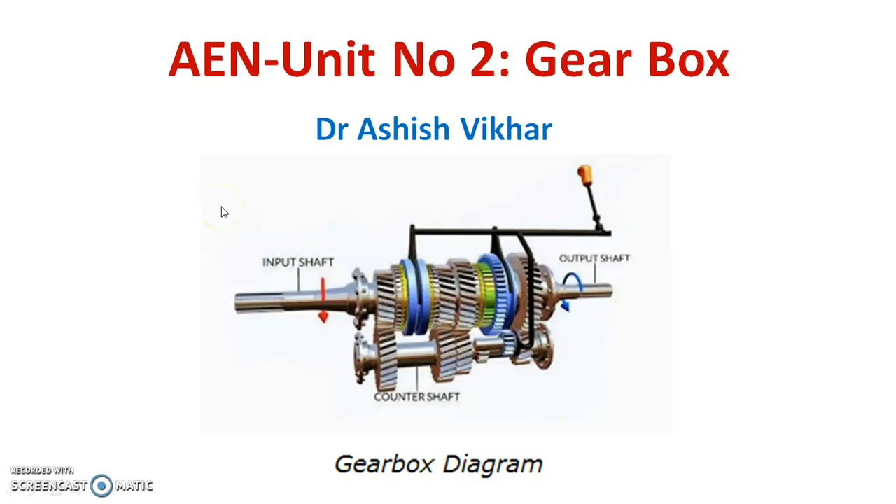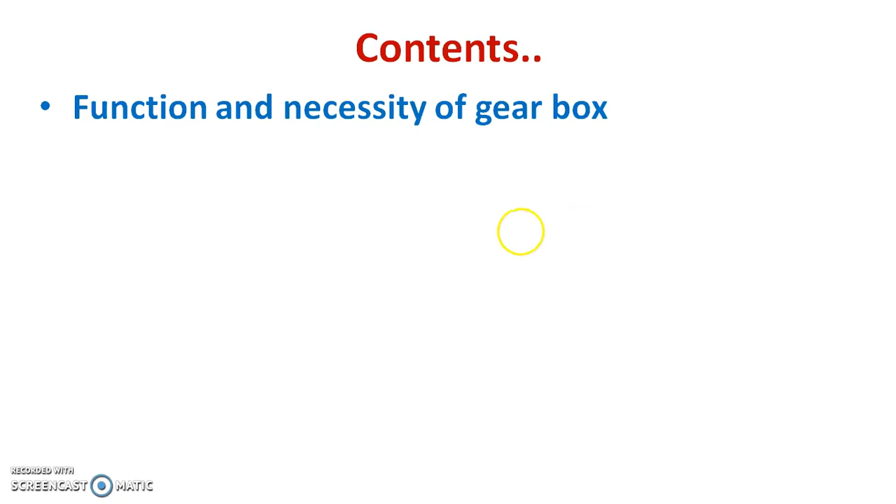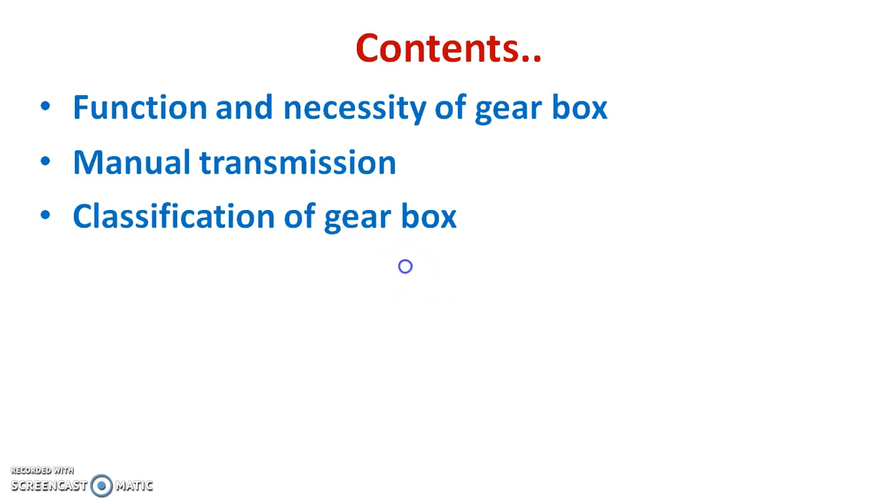In this, we will study basically the function and necessity of a gearbox, what is meant by manual transmission, how the gearbox is classified, and different gearboxes mentioned in the syllabus. One of these is called a constant mesh gearbox, so we'll study its construction and working with its power flow diagram. After that, the construction and working of a synchromesh gearbox with its power flow diagram. These are the two main important gearboxes we have to study.

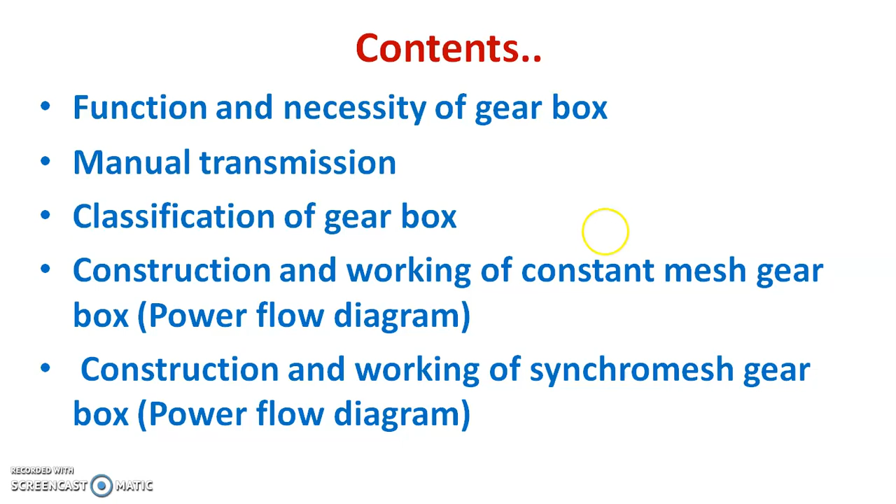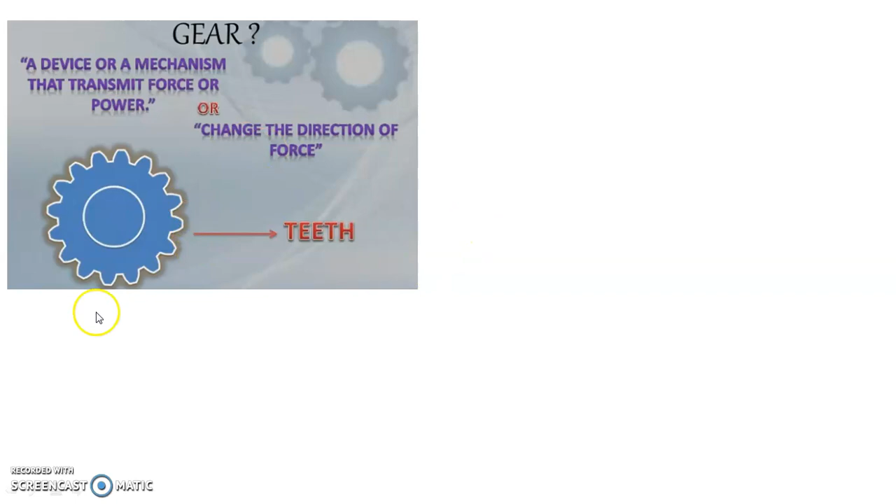Starting with what is meant by gear. We know very well what a gear is, which you have studied already in the second year. It is a device or mechanism that transmits force or power, or changes the direction of the force. This is a gear that you will see in this picture.

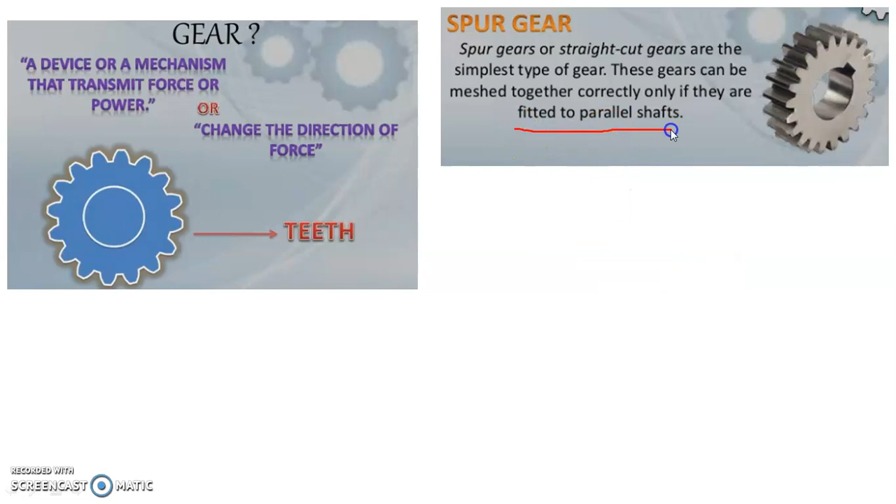After that, there are certain types of gear. The number one type is the simplest gear, called a spur gear. Spur gears or straight cut gears are the simplest type of gear. These gears can be meshed together correctly only if they are fitted to a parallel shaft, as shown here. This is a spur gear.

After that, next is the helical gear. Helical gears offer a refinement over spur gears. The leading edges of the teeth are not parallel to the axis of rotation, but are set at an angle. So here is the important point: the leading edges of the teeth are not parallel to the axis of rotation, but set at an angle. This is the second type, and you will see the picture of this helical gear.

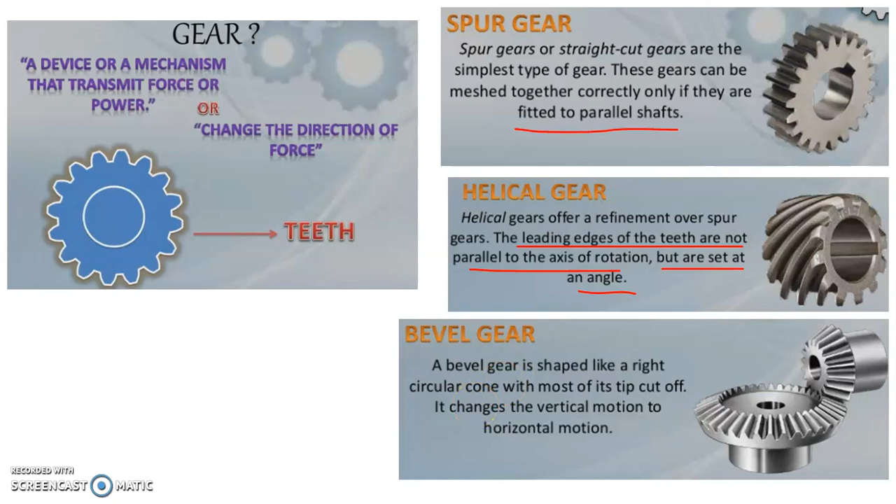The third gear is the bevel gear. A bevel gear is shaped like a right circular cone with most of its tip cut off. It changes vertical motion to horizontal motion.

Next is the double helical gear. Double helical gears are herringbone gears, so herringbone gear means double helical gear. You will see the picture of this in this slide, and it overcomes the problem of axial thrust.

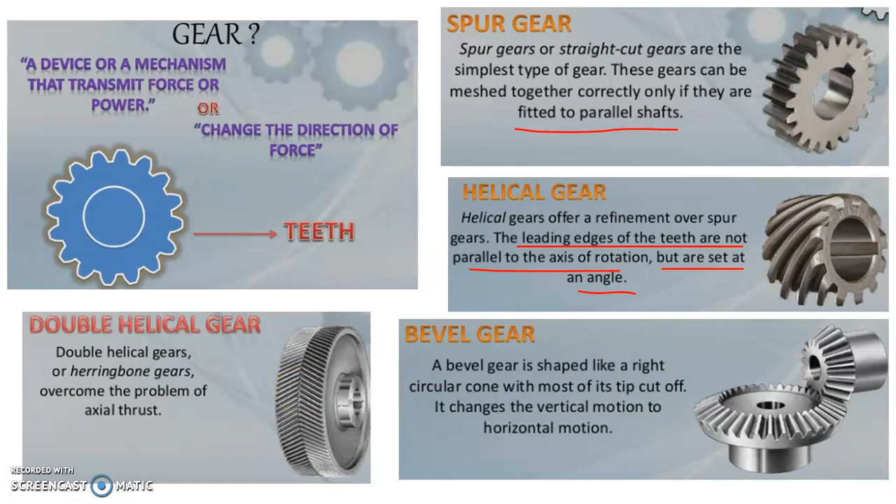After that, the gear wheel or worm wheel. Worm gears resemble screws. A worm gear is usually meshed with a spur gear or a helical gear, which is called the gear wheel or worm wheel.

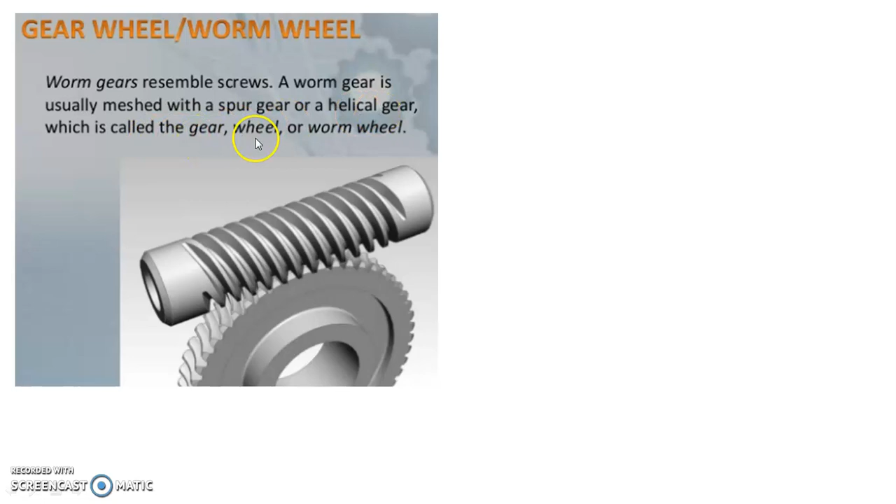Next is rack and pinion. A rack is a toothed bar or rod that can be thought of as a sector gear with an infinitely large radius. Torque can be converted to linear force by meshing a rack with a pinion. The pinion turns, and the rack moves in a straight line. So these are certain types of gears.

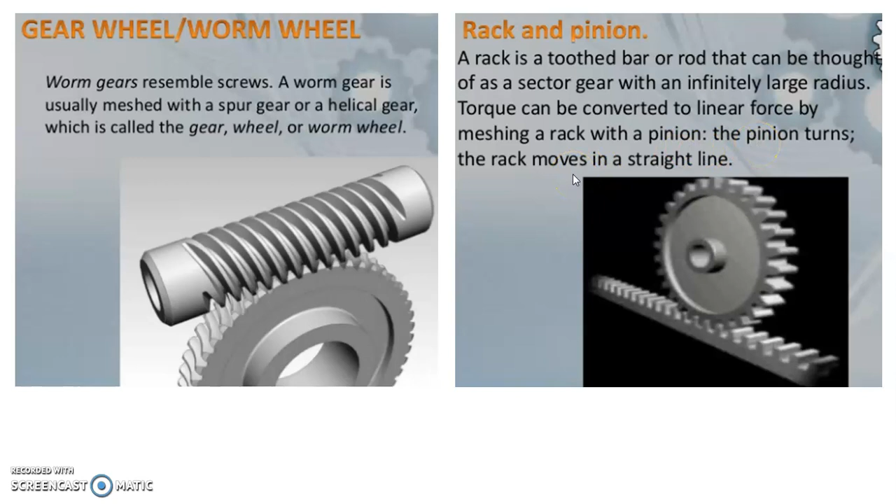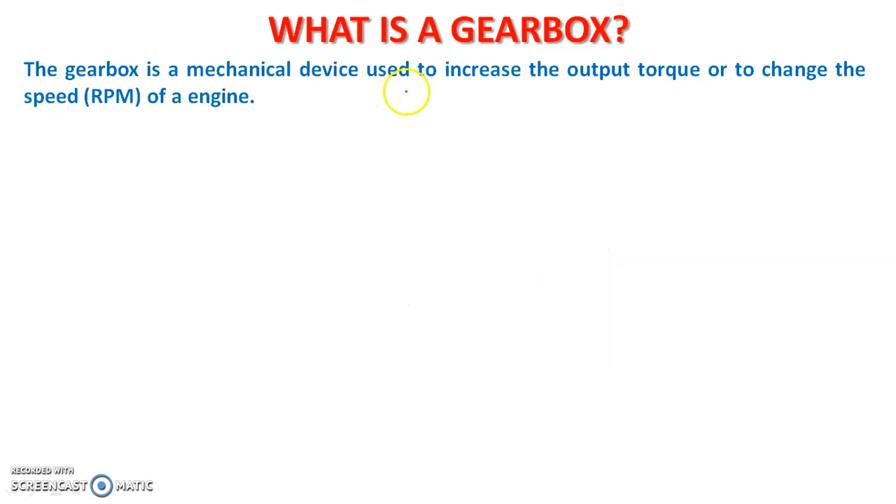So what is a gearbox then? The gearbox is a mechanical device used to increase the output torque or to change the speed of the engine. So what is the purpose? That is also given in this definition: it is used to increase the output torque or to change the speed of the engine.

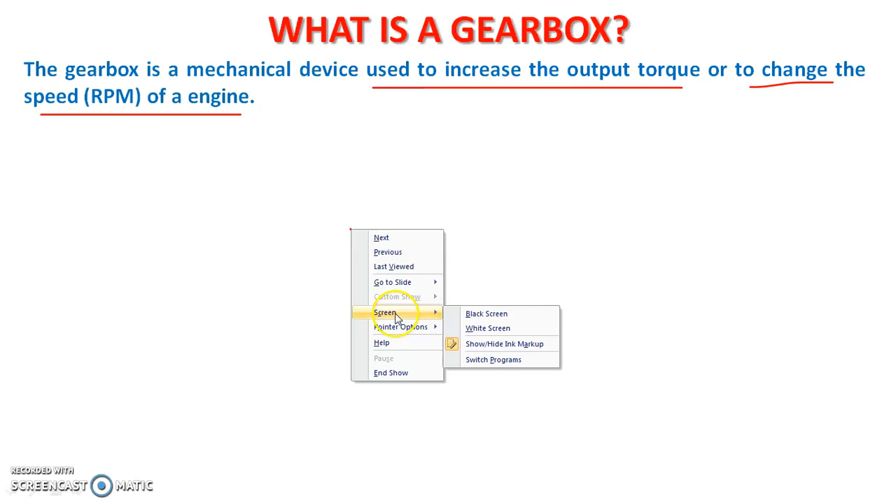Let us see the details. The shaft of the engine is connected to one end of the gearbox, and through the internal configuration of gears of a gearbox, it provides a given output torque and speed determined by the gear ratio. So the gear ratio plays a vital role.

Here are pictures showing that the most basic type of gear used in a gearbox is a spur gear, and the second one is wider gears, cut with teeth at an angle for smooth meshing, called helical gears. These two types of gears are most widely used: one is called a spur gear and the second is called helical gears.

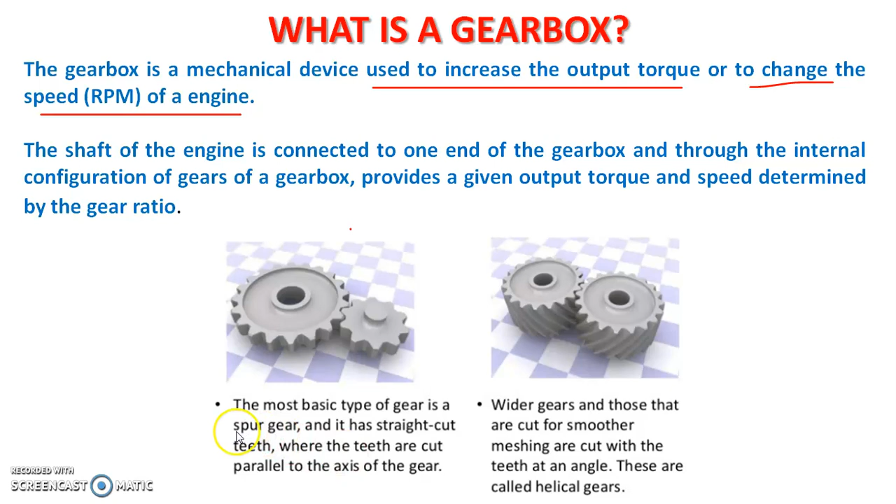Because of the angle of cut, helical gear teeth have a much more gradual engagement with each other, and they operate more smoothly and quietly than a spur gear. This is a very important point related to the helical type of gear.

Helical gears can transmit more torque because at any time more number of teeth are meshed. Gearboxes for cars and motorbikes almost always have helical gears, which is very important.

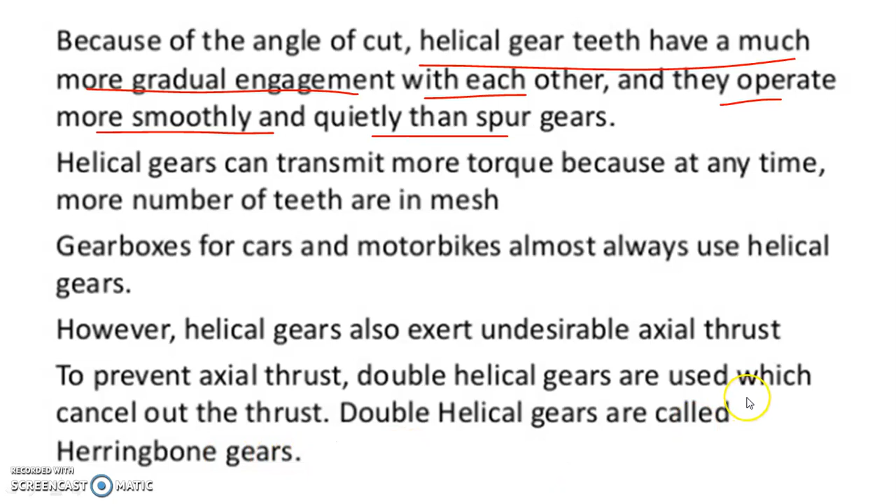However, helical gears also exert undesirable axial thrust. To prevent axial thrust, double helical gears are used which cancel out the thrust. These double helical gears are also called herringbone gears.

Here you will see a typical example of gear ratio for a 5-speed manual gearbox: first gear, second gear, third gear, fourth gear, fifth gear, generally such gears as seen in automobiles. The ratio is given at the start: 3.16 to 1, 1.88 to 1, 1.29 to 1, 0.97 to 1, 0.73 to 1.

RPM of the gearbox when the engine is at 3000 RPM: if the engine is running at 3000 RPM, first gear gives 947 RPM. So it is increasing, and at the fifth gear the speed has been increased up to 4065 RPM. This is the concept of gear ratio, and we can have an idea of how the gearbox works and how we can get different speeds with the help of the gearbox.

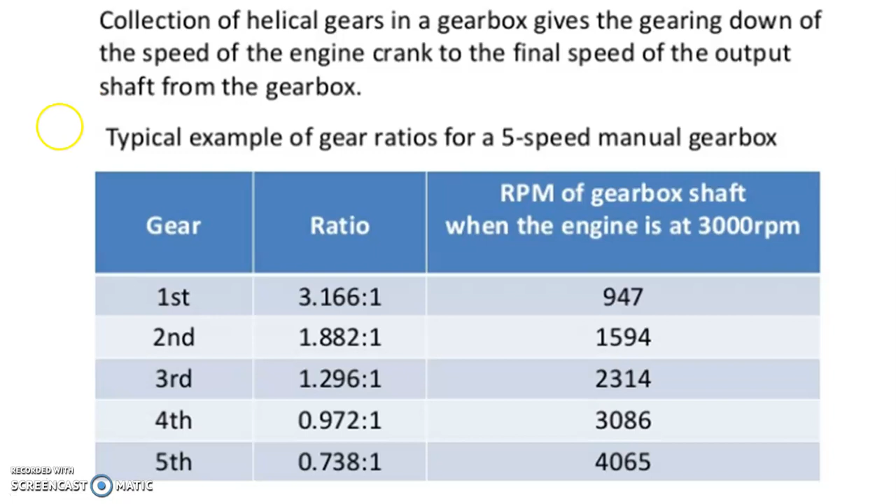Gearbox provides speed and torque conversion because of the limitation of internal combustion engines. It also facilitates change of direction of the output shaft for reversing. Automotive gearboxes are used to reduce load on the engine by manipulating torque and speed.

They have the option to select one of several different gear ratios. Once the engine has reached a certain number of revolutions per minute, it is advisable to increase the gear to reduce the engine RPM, to reduce wear on the engine, allow more control and greater speeds, better acceleration, and better fuel economy.

Most gearboxes are used to increase torque and reduce the speed of the output shaft. This produces mechanical advantage. An automotive gearbox also has the provision to do the opposite, that is, provide an increase in output shaft speed with a reduction of torque. So this covers the purpose of the gearbox.

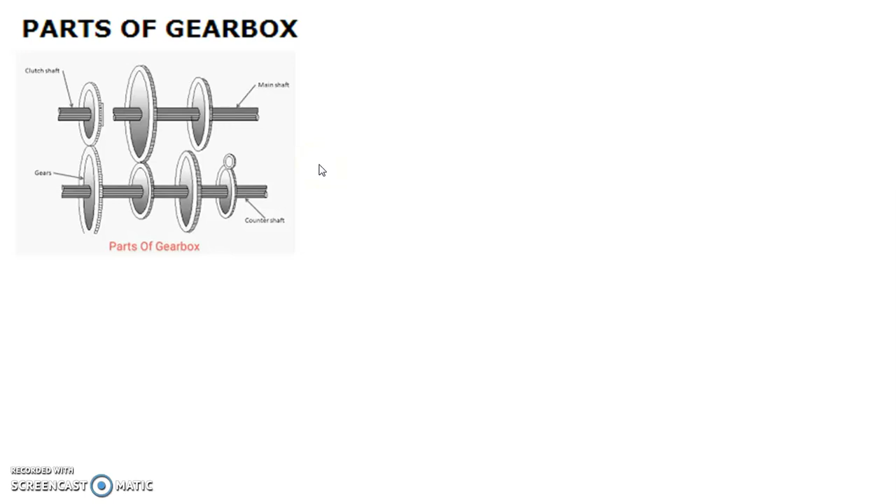Parts of the gearbox you will see here: clutch shaft, main shaft, counter shaft, and gears. These are some of the parts of the gearbox. What is part number one? The clutch shaft, also called driving shaft or input shaft. A clutch shaft is a shaft that takes power from the engine to supply another shaft.

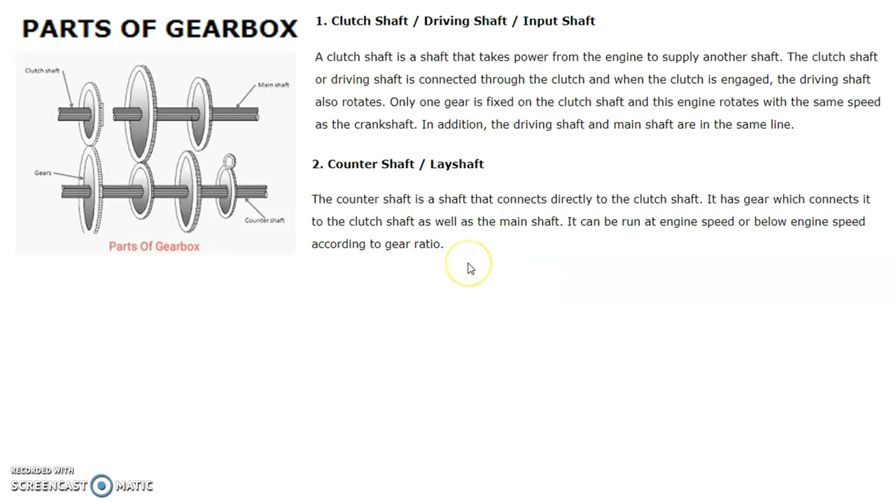Next is the counter shaft. The counter shaft is a shaft that connects directly to the clutch shaft. It has a gear which connects it to the clutch shaft as well as the main shaft. Third is the main shaft or output shaft, which rotates at different speeds and also provides the necessary torque to the vehicle. These are the three important components.

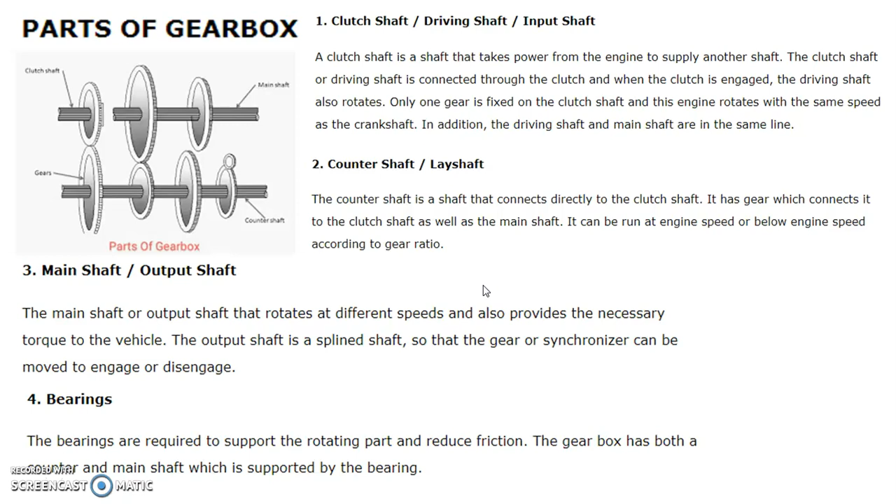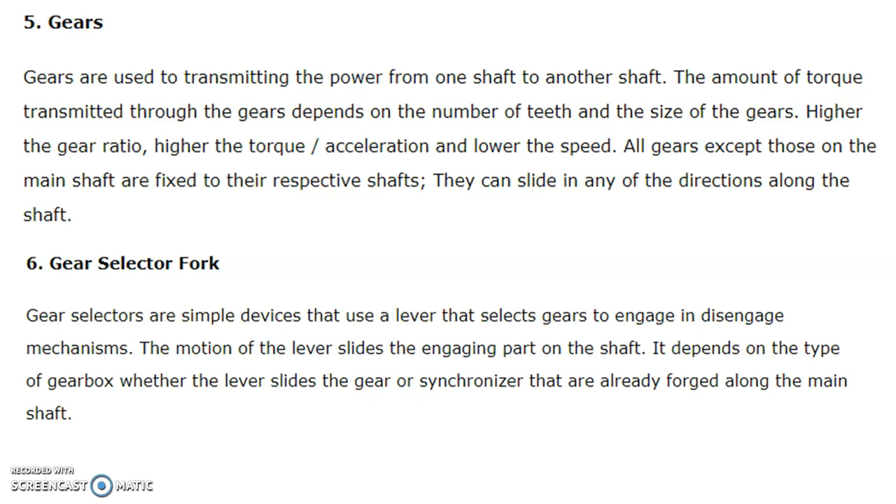After that there is a bearing. Bearings are required to support the rotating part and reduce friction. Next part is gears, used for transmitting power from one shaft to another shaft. Then the gear selector fork: gear selectors are simple devices that use a lever to select gears to engage and disengage mechanisms.

Let us see the classification of gearbox. Number one is manual transmission, which has three types: sliding mesh gearbox, constant mesh gearbox, and synchromesh gearbox. Second type is epicyclic gearbox, and third is automatic transmission, which has two categories: hydromatic gearbox and torque converter gearbox.

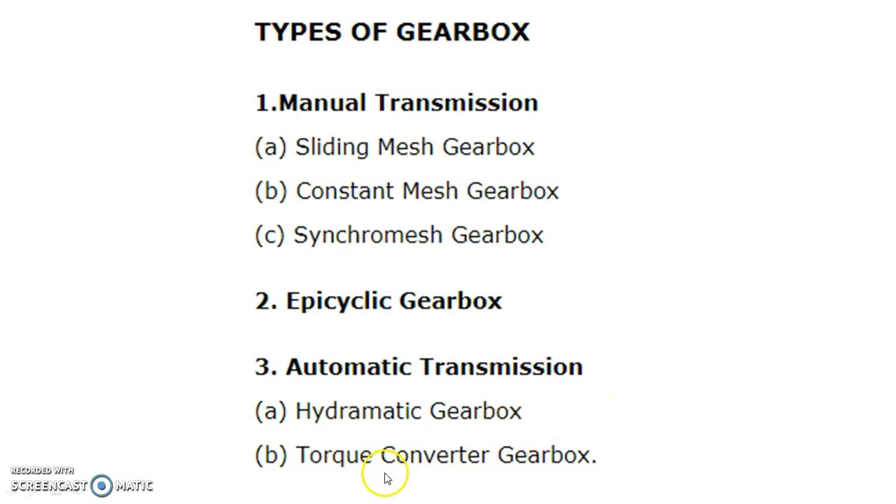First is the sliding mesh gearbox. There are three gears, 1, 6, and 5, attached on the main shaft, and four gears, 2, 3, 4, and 7, on the lay shaft.

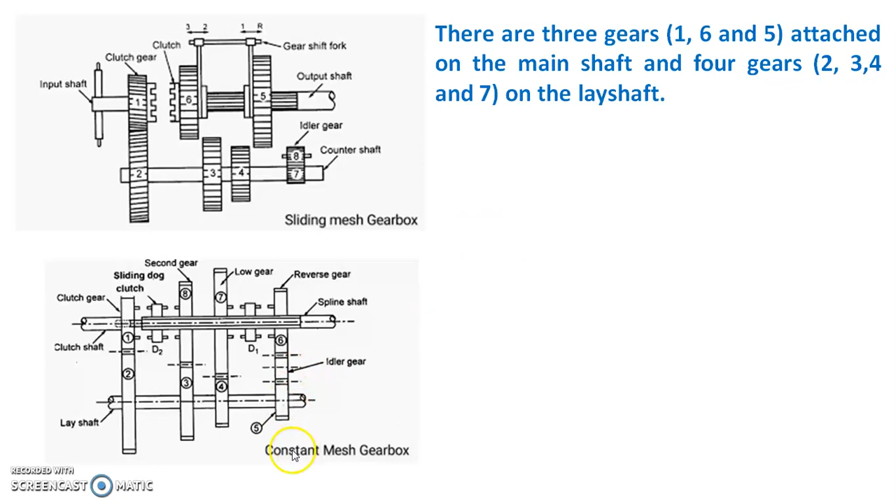Second type is the constant mesh gearbox. In this, all gears are constantly in mesh and dog clutches are used for engaging and disengaging the gears. Here you see dog clutches D1 and D2 mounted on the main shaft.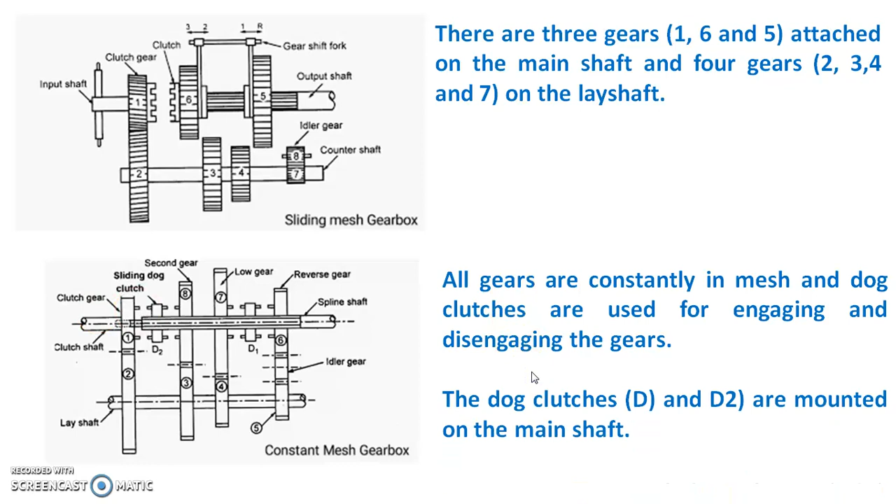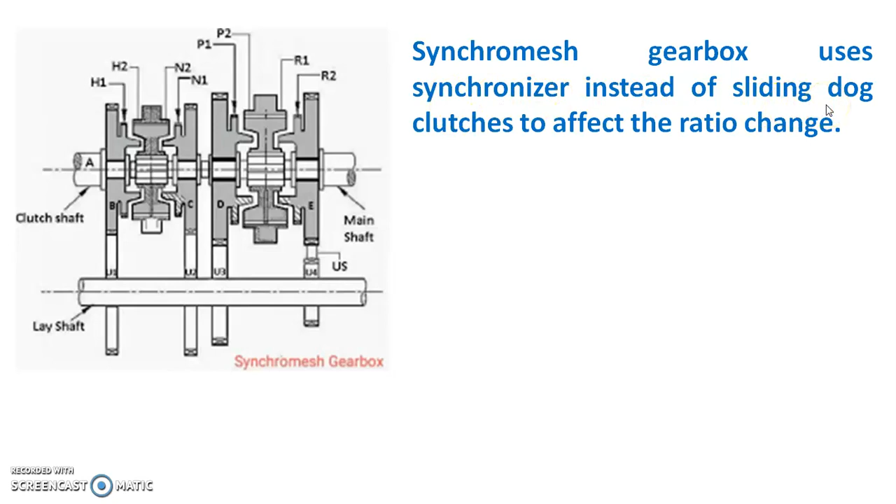The third one is the synchromesh gearbox. This uses a synchronizer instead of sliding dog clutches to affect the ratio change. The synchromesh gearbox is similar to the constant mesh gearbox, but it is provided with a synchronizer, a device by which the two gears to be engaged are first brought into frictional contact, which equalizes their speed. Afterward, they are engaged smoothly.

So these are the three gearboxes we have seen in short, but we will study them in detail in the next lecture. Thank you very much.